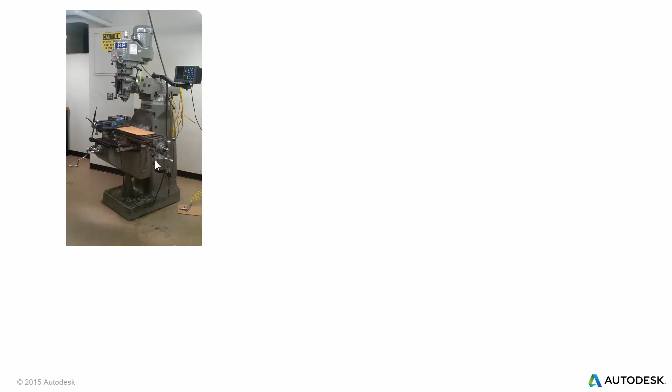This was one of the things that I ran into in the early 2000s. I was working at a manufacturing place in Rochester, New York, and it was a tool and die shop, and we were kind of converting from tool and die over to do more production runs. But what was happening was that the tool makers were really approaching their CNC machines the same way that you approach a Bridgeport.

What that means is if the tool maker needed a mill, he would go over to the CNC mill. If he needed a lathe, he would go over to the lathe—not really treating the machines much differently than we did in the old days.

So what we talked about in the Unattended webinar was how we could pile more stuff on the table and actually utilize the technology we have today. That's kind of what we're going to build on.

Before I get to that, in the last webinar I also shared my email address like I just did with you here. I got a few questions because I made a comment about this Matsuura H.Plus-300 that I use to program. This is an 11 pallet pool machine, and I think it fits pretty well with what we're going to talk about today. This was a great machine, and I loved running it.

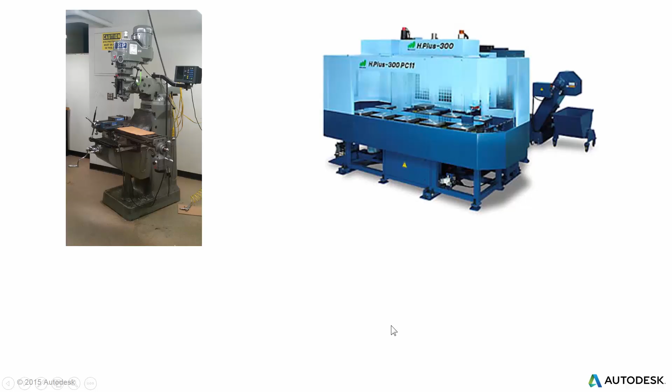Now, what I'm going to be using today is 3 software packages that we offer at Autodesk. I'll say, if I do a decent job—and you be the judge of that—I'd love your comments. Send me an email or put them in the comment area if you don't agree with me. But if I do a decent job today, it doesn't really matter what type of CAM software you're using. If you're using GibbsCAM, Mastercam, or some of the other ones, they have similar functions to what I'll be using today.

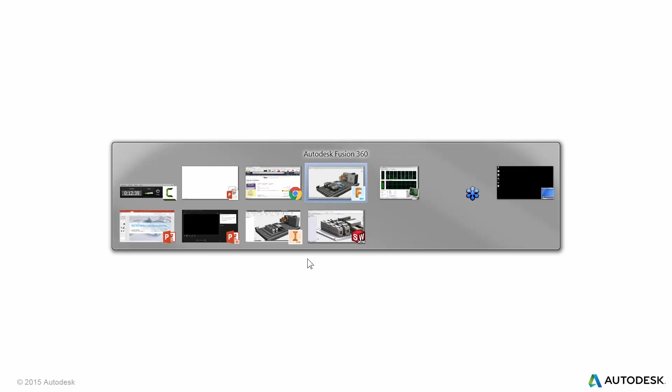Also, I normally get asked about pricing at the end. I have a slide for that, but I don't want to get into pricing right now. I really want to get into today's topic here. So let's jump into the software and get going.

What you see on the screen here is where I left off in last month's webinar, talking about running unattended. I'm really trying to fit a little bit more on your machining table than just one Kurt vise and be done with it. Because when you only have one vise, you can often only machine one part at a time, and that means setup becomes this huge overhead. Like I said when I started, when you're quoting machining, it's really hard to charge for setup time. Most people don't want to pay for you to set up the machine, but before you look around, you've easily spent 45 minutes setting up on the mill.

So some of the things you can do is try to add more things to the milling table, and maybe you're running all of them at the same time, or maybe you're just picking out what you have in there. What we had from the overnight run is these two types of vises—one is an orange vise with a dual station in it, and the other is a Kurt vise with a little fixture on this sub plate.

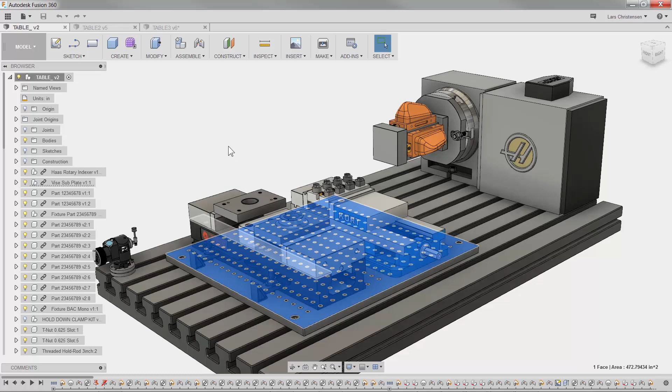I also talked a little about how, if you have the right type of job, something like a 4th axis gives you an option to machine multiple sides of parts. Of course, this all depends on what type of parts you can bring into your shop. I was a big fan of batching things together, and when we started running overnight, we actually did it only on Tuesdays and Thursdays.

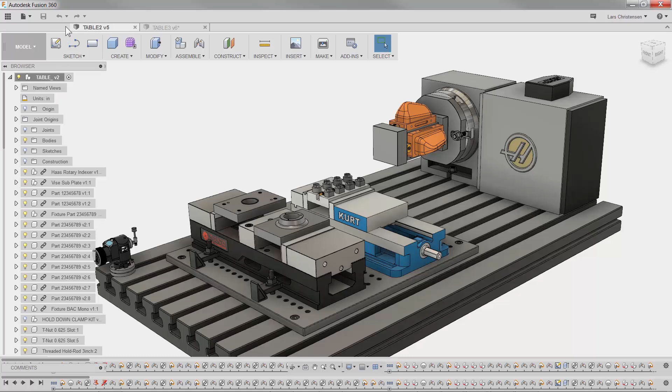So what I did for today's topic, where we talk about making your mill run longer between setups, was introduce another type of vise. I'm swapping out this orange vise, which is a dual setup, with another type of vise that's very handy.

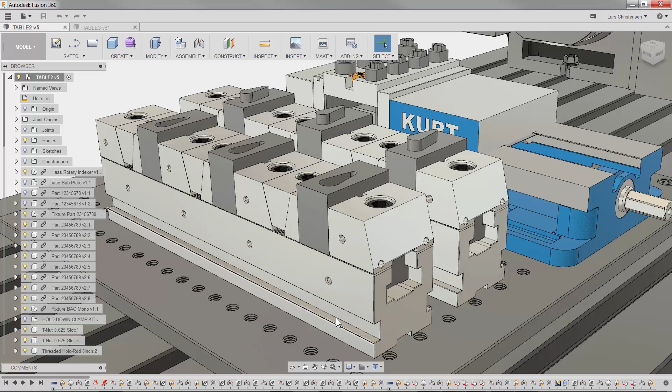These vices are specifically from a company called Tombstone City. I've used these and had great luck with them, but I know other manufacturers make similar ones - I know Kurt has something similar. What's special about this type of vise is that each jaw is actually sitting on teeth, which I hope shows up in the image here.

This means that with this type of vise, you can actually move things around. You can take these different solid jaws I'm highlighting here and shift them around for different types of parts, giving you the flexibility to run a bigger variety of different parts. I'll come back to this setup in a bit when I jump into Inventor - right now we're inside Fusion 360.

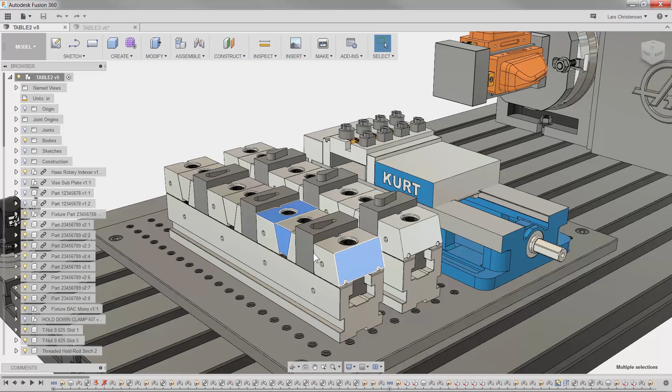One of the things I wanted to show about these vices is that I sometimes took this whole end section here and replaced it with something like this. This might show up better if I've already programmed something - turn my stock on here. Now I'm almost using the bottom half of these vices as a standard vise, while still having room for some other parts over here.

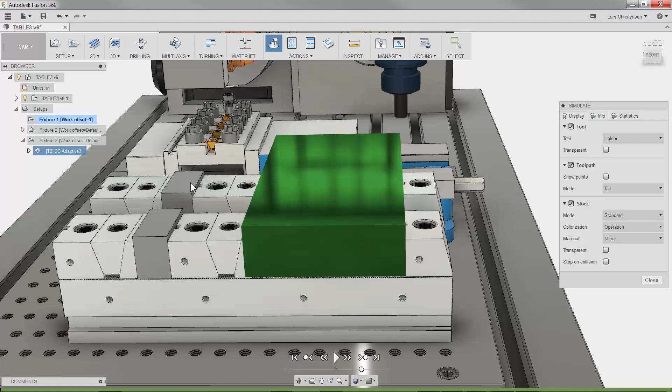So what I'm talking about here is, if you can set up your machine so it's a little more flexible for different types of parts, that gives you an option to run different styles without constantly having to fit things within one vise, take the vise out, clamp things to the table, and so on - so you're sitting idle all the time.

So definitely think about your work holding. I'm not affiliated with any of these - this is just what I've used in industry and found extremely helpful.

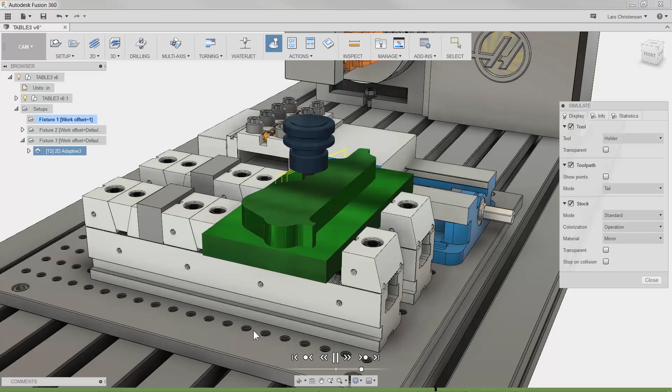In this case, I'm machining a part that I'd normally run in a standard Kurt vise style, but now it's actually running on the bottom end of this Tombstone vise, where you can adjust and program other parts.

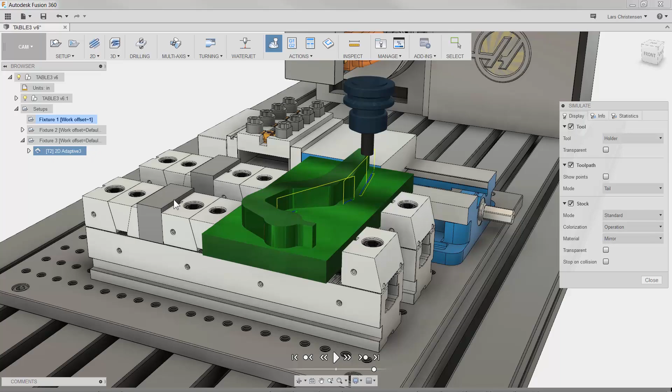If you didn't see the webinar from last month, let me move over to the Kurt vise here and just quickly talk about what we have over here. I used these parts, or a variation of them, in my last webinar. What we have here is actually a fixture within the Kurt vise.

I used to do this quite a bit - it makes it really handy. So not only holding your part in the Kurt vise, but actually building fixtures that you can hold within there. And then of course you can have a pickup hole or something on this fixture so you can take it in and out. Let me just quickly hide the parts here to take a look at this fixture.

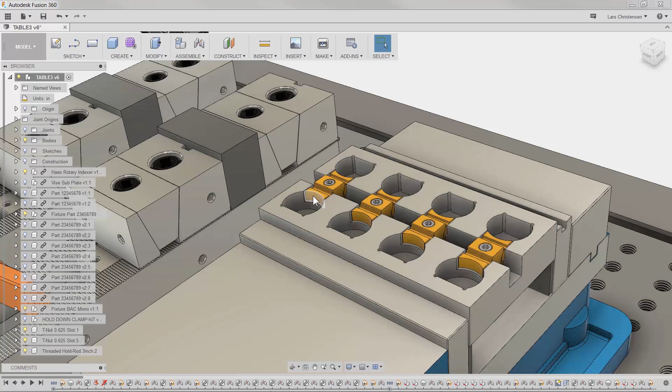This fixture could just be machined out of, for example, 6061 aluminum or something. And what I'm using here is something called Mitee-Bite clamps. Use those quite a bit. These are actually machinable, so you can machine that radius on whatever your part is.

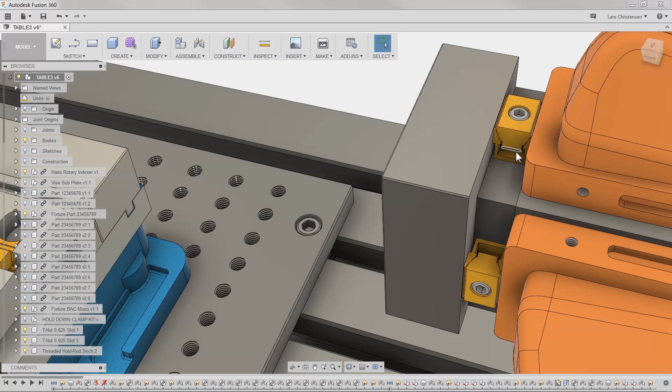But you will actually see I'm using them over on the A-axis also, another variation of these Mitee-Bite clamps. These are called Uniforce over here. So think about actually being able to create some of your fixturing inside of your machine and either make it so you can take it in and out by putting a pickup hole in or something like that, or literally machine a fixture as it's sitting in the vise.

So you know that the relationship between these holes and when you put the parts into them are going to be perfect. Because that's what would happen if I put this raw block of 6061 in here and I machined out the fixture and then I plugged the parts in. Well, then we can agree that I would have pretty accurate parts, right? It's only when you start taking things in and out of the vises that you run into issues. Now, of course, this all depends on what type of parts you are machining. But if you start setting parts up around on your table, playing around with that really gives you a big advantage.

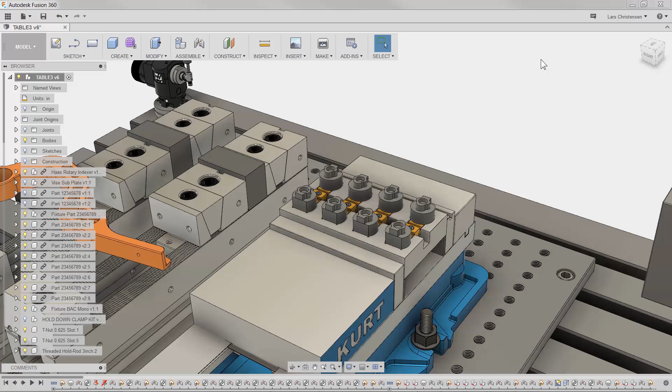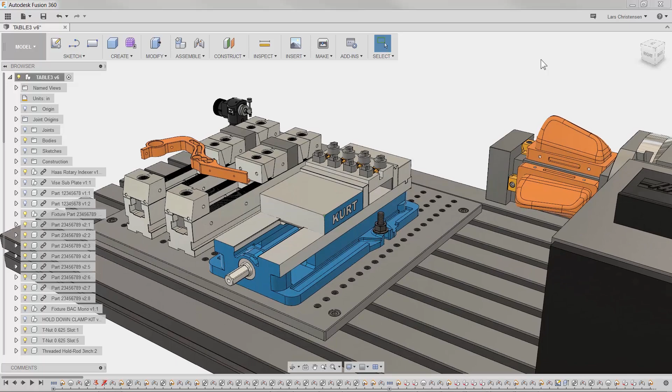And being inside of something like what I'm using today, Fusion 360, Inventor, or SolidWorks, really gives you an opportunity to design right inside of the environment in here where I'm also going to be programming. So this is where I'm going to put my CAM toolpath on. What I see here is an exact picture of what is out of the machine. That makes it a lot easier to program, means that I don't have to spend a lot of time out of the machine verifying things, because I know that what I have in my CAD system is what I have out of the machine. So that's just some of the things to consider when you're in this environment here too.

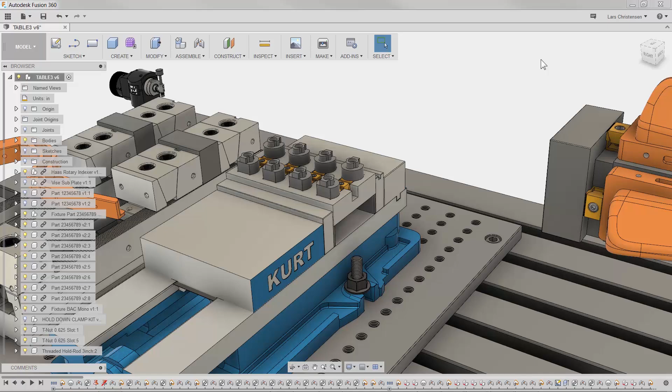Now, one of the things I showed in my last webinar was how quickly we can program parts by only programming one and then reusing that data on multiple parts. So here we have 8 parts that are kind of like the same size, the same batch. And one of the questions that came up from that was, how can you optimize your tool path so your cutter is more engaged with the material than it is making tool changes and so on.

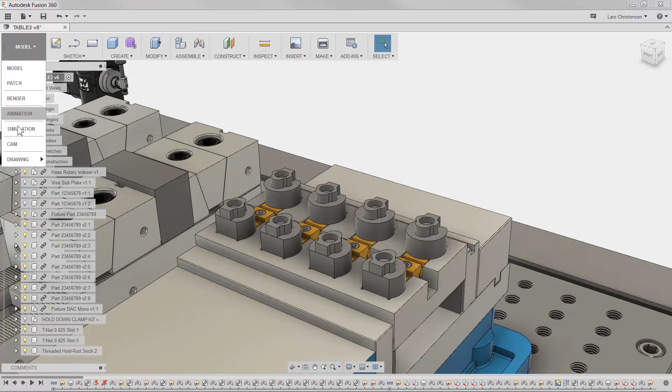So I just thought I would show that here, and we can kind of just dig into that and make sure that we get that straightened out here. So let me just jump into my CAM environment here, and I already have a setup for this part. So let's just go in and throw a couple of toolpaths on it.

So what I'm going to do is I am going to rough the part out. I'm going to use what is called a 2D adaptive clearing. I'm not going to get too much in depth with all the menus and stuff like that within this, because like I said, it doesn't really matter if you're using GibbsCAM, Mastercam, or something else. Most of these type of toolpaths is there.

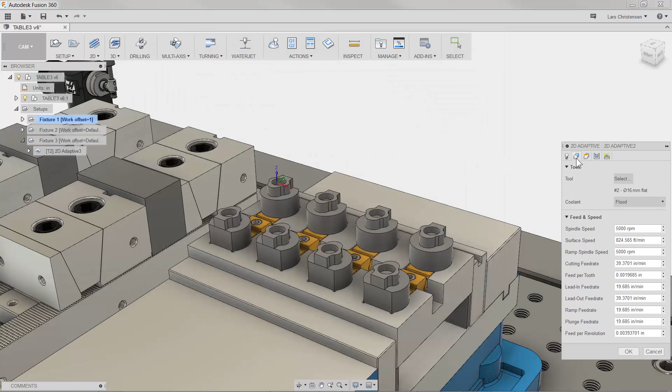Now I will note I'm going to rough it out with the same end mill that you saw. I just did that part over to the right over there. So I'm going to hit OK, and I'm just going to select right on that model here. So we have our rough toolpath. Well, let's just go ahead and simulate that. Hit play. And I'm not going to tweak things, but you can kind of see we quickly get that roughed out there.

I am also going to do a finishing operation. So I'm going to go ahead and select what is called a contour on that same thing. Now I'm going to select a 3/16 end mill for that, and I'm going to select the same edge just to finish around there. So we got that. And then you will see there's a little hole up on the top. I'm going to just go in and do what is called a circular toolpath on that with the same tool. It's not really too important.

So what I have now is three toolpaths, and that is going to finish off that part. So it's going to rough it, it's going to finish the outside, and then it's just going to do the center hole there.

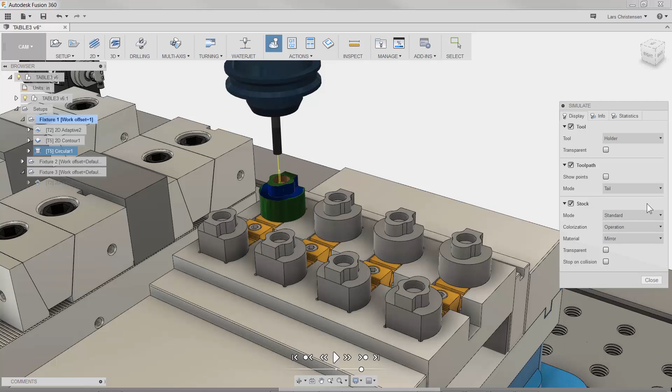What I showed in the last webinar was how easily I can apply these toolpaths to the rest of these parts. All I'm going to do is highlight them, right click, and create a pattern from these. You get different options here - you can do a linear pattern where you choose how far you want the jump to go, you can see a little jump pop-up shows it, or you can do circular patterns. But the one I picked was called a component pattern. What that means is when I select my part that I programmed, it will find all the same parts that are in here. So just like that, I have now programmed all of them.

Now, one of the questions that came out of the last webinar was about order of operations. I wanted to take a second to show that, because this is extremely important when you're trying to become better at programming. Like I used to tell machinists I trained, you want to become like the pit crew at Formula One or NASCAR, where you're top notch, the best out there. Knowing some of these functions is very important. If you're feeling completely comfortable with what I'm going to show you now, you should pat yourself on the back, because you are actually in the top 10% of people who understand utilizing technology.

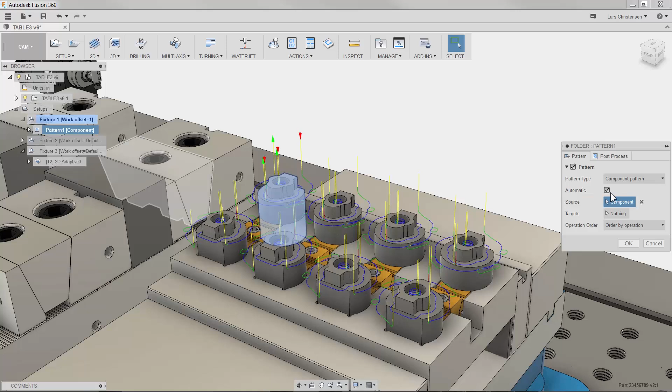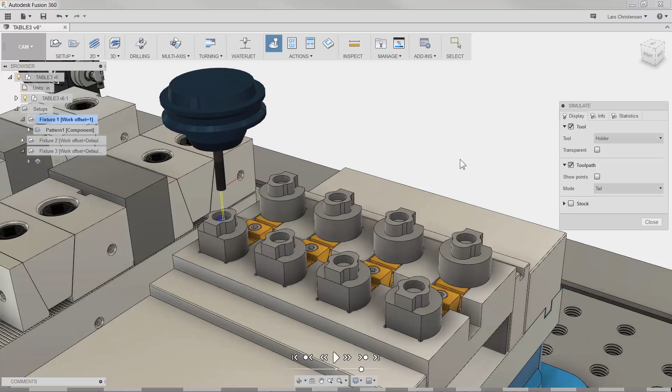So the last option is order by tool. Now we will see that it is going to do each part by the tool. So the first one's going to run through here just like it did before - I'm trying to speed it up, but I can't. There we go. And now you will see that it's finishing at the top. So this is the way that you can very quickly program in your CAM software like this, but also where these small settings within whatever CAM system you're using can mean that you can be more efficient in how you're programming. I think it's worth thinking about this and utilizing these tools here.

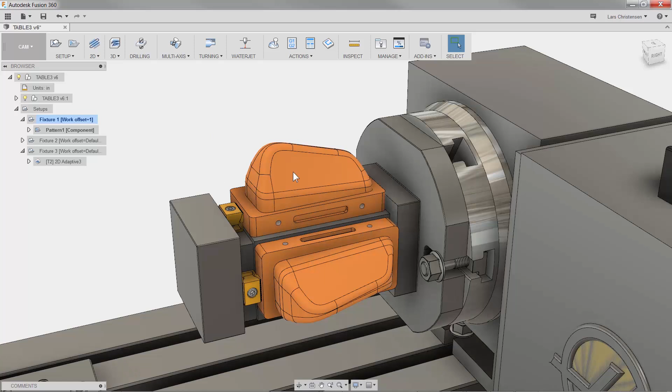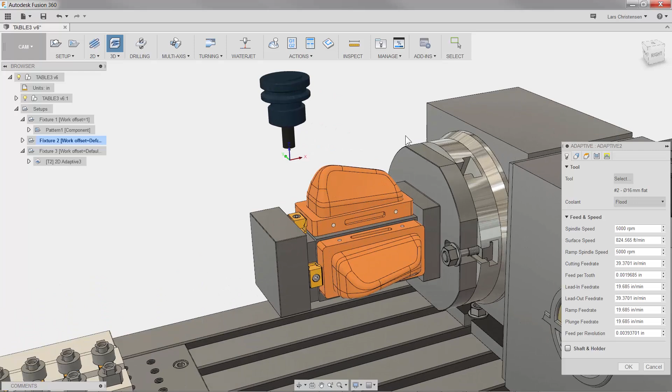Now, another thing I just quickly wanted to show that I think is important. When I programmed this, I actually did it in SolidWorks with HSMWorks in the last webinar. This one here, I'm going to do in Fusion. I programmed this part here, and I have a setup for it. So I'm just going to go in and make that active, and let me apply an adaptive clearing here. I'm going to use that same end mill that we used to machine this part down in the lower left, our little fixture here, and then I'm going to use the same one over here to rough this part in. All I want to make sure is I only machine to this depth here. All right, like that. Now I'm using adaptive clearing here for this - it's a really great toolpath.

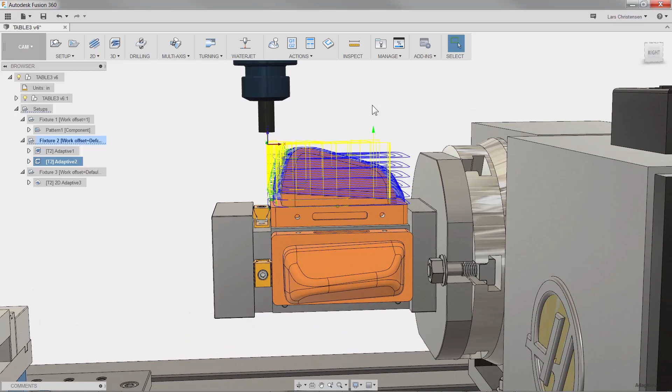What you will see, when I go in and simulate this, let me turn the stock on here and hit play. You will see down at the bottom some red lines because I'm going to have some collisions, as my tool is not sticking far enough out of the holder, and it will actually collide with the stock.

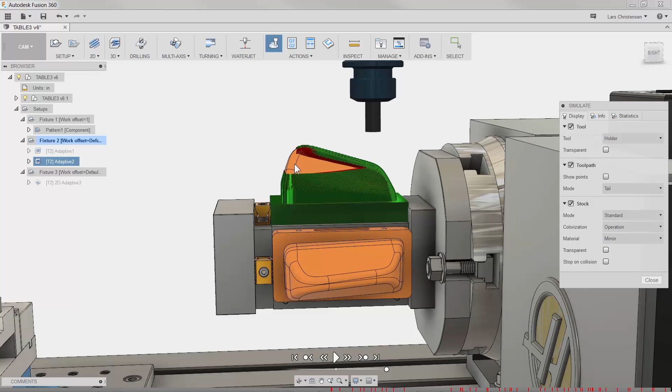First of all, you see the tool turns red, but you would also see it get a big gash right here. This is not pretty, and like I said in the last webinar, no sparks in the dark, and that is definitely still the case. Anybody who ever had a tool holder hit either a fixture or stock knows what I'm talking about.

But there were a couple of different options in here that can help us with this. If you go down to the bottom, there's something called shaft holder detection, and that exists both within Fusion 360, within Inventor HSM, and also within HSMWorks that runs inside SolidWorks.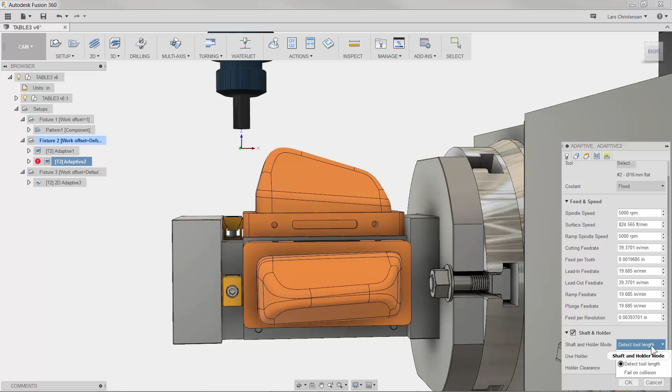I have some different options. One is called pull away, where the tool will stay away - it knows where the tool and holder is and will step away from the part. That means it's going to leave more material down here because that's where it would collide. So the tool backs away from the stock. It's helpful because we're not colliding with our part, but it will leave some more material for our finishing operations.

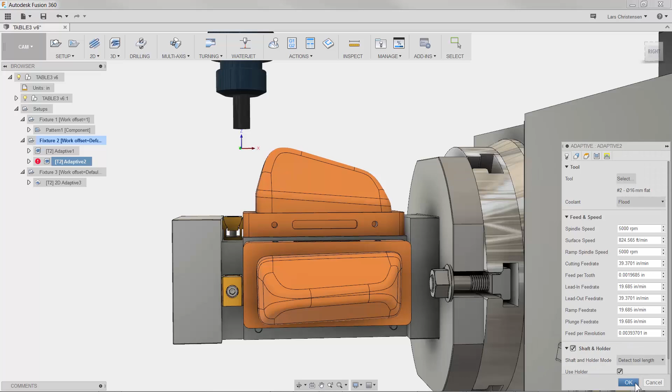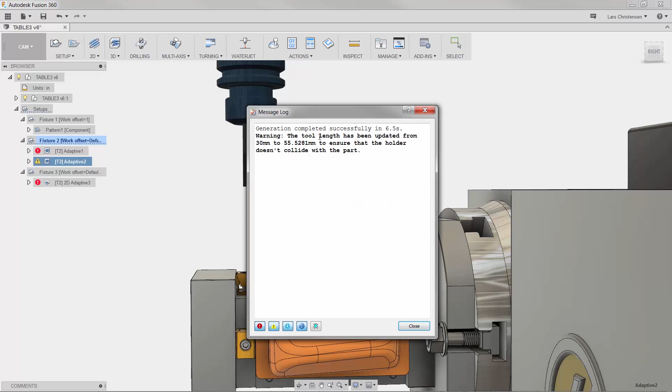But the other one I showed was called Detect Tool Length. When you select Detect Tool Length, the software will analyze, and you'll see the tool is going to be further out of the holder. Just like that, you see how it extended the tool out of the holder to be able to come down here without crashing. It gives us a little warning, and if I right click and hit show log, it will show us that the tool length has been extended from 30 to 55.5281 millimeters.

Now the reason I'm showing you this is because it's important to know this takes effect all across. That means the first part of the program, if we go into that one, that toolpath actually needs to be regenerated also because it has taken effect all the way through - the tool is now longer, not just on that part we just did it on, but the software is smart enough to know it needs to do that on all three places we are using this.

So what this means is by using these kinds of options inside your CAM software, it lets you do less testing out at your machine and therefore saves you time. So your machine can run, and run longer.

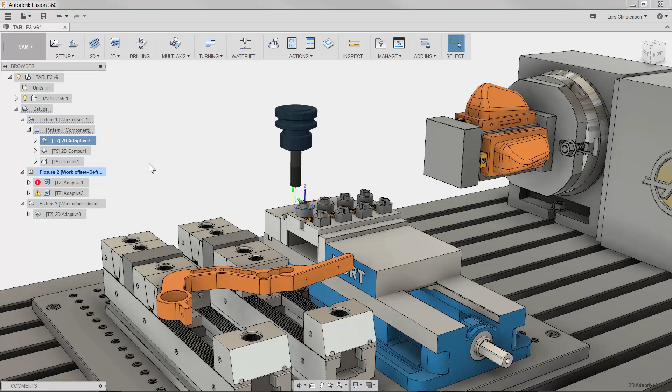I hope this is super helpful. So just to end out with Fusion here, think about how you can add more fixturing and parts on your machine, but also how you can utilize some of the things within your CAM system to help you program while the machine is running. So when you have that downtime where you got to load programs in and change parts and so forth, you can trust that what you're putting in there is good.

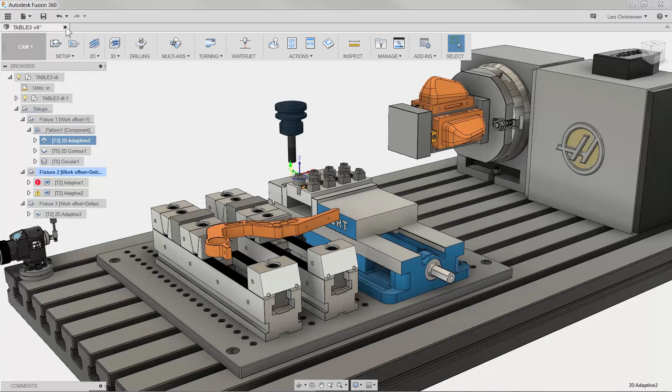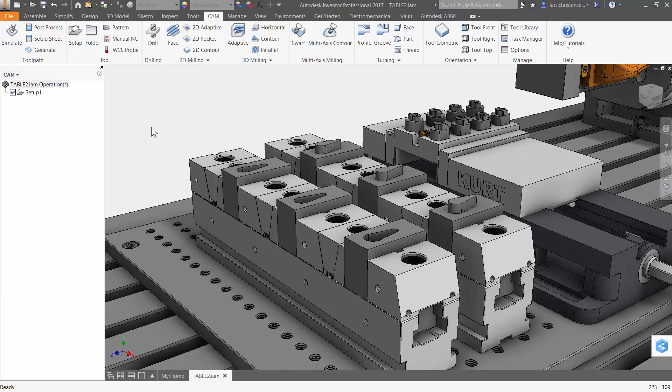But one of the things I showed in the last webinar was probing, and I'm going to show you my poor man's probe. If you don't have a Spindle probe, or if you have one, or if you don't have a Spindle probe, you might have a table probe here. You can utilize that with the poor man's probe, but you don't even have to. First, let me talk about the standard Spindle probe that maybe is in your machine and how you can utilize that. What I want to concentrate on here is we've got these 3 parts sitting here, and I already got one set up for one part, so you can kind of see how that highlights right here.

One of the things I used to run into was even running small batches of production, let's say 8 parts loaded into your vices, you'll always have some kind of stop in there, but misloads can still happen. One of the biggest advancements in milling recently is spindle probes and how you can use them to set your work offset, not just when setting up your vises or picking up your part in the beginning, but throughout your program. Let me show you what I'm talking about.

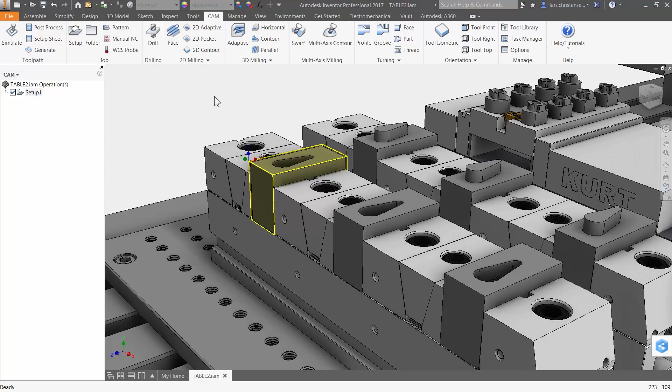Right now I'm inside of Inventor. If I go in here and select a probing cycle, I'll select my probe, and select what I want to probe, the top face here. So what I'm getting is a probing cycle that's going to go in and find the center of this part. Let me quickly simulate it so you can see. I'll hit play here, and you see the probe is going to go in and pick up the center of this part.

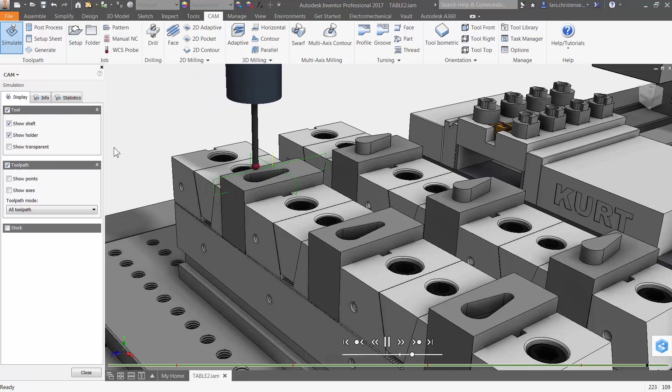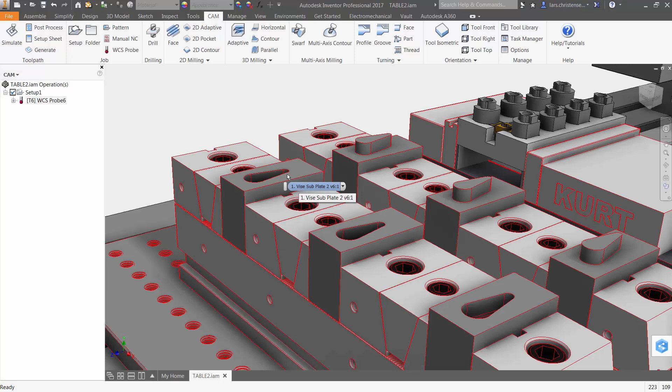What's really neat about this is I can use the probe to reset my work offset. If I set my work offsets up, one being G54, G55, G56, I can have it so you put these parts in here, and even if you don't get them right up to the stop, if you just get them close, my program can re-pick up the part and reset that G54. Let me show you what I mean.

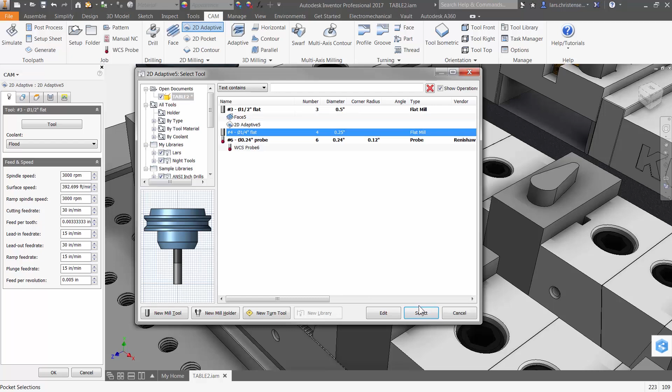For this operation I'm going to set a facing operation, I'll do this quick, using our 1/2 inch end mill. I have a facing operation, and I'll also quickly do a 2.5 axis. Now I'm going to change my tool to something smaller, a 1/4 inch end mill, and just pick the bottom here. Again my point isn't so much about programming a part, I'm just making a couple of operations.

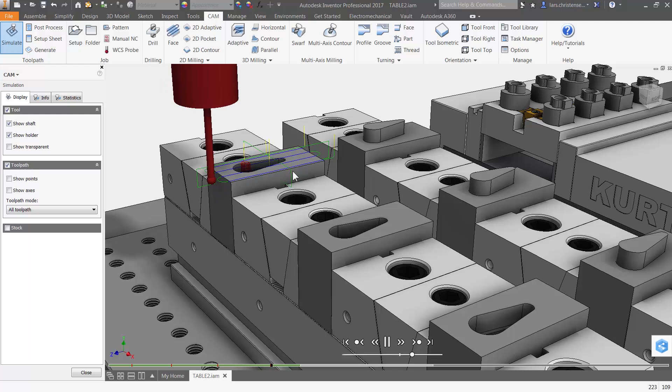So what I have here is a cycle for machining where my machine is going to go in and begin by picking up the part, resetting the G54, then it's going to face off the part, and then it's going to rough out that center pocket.

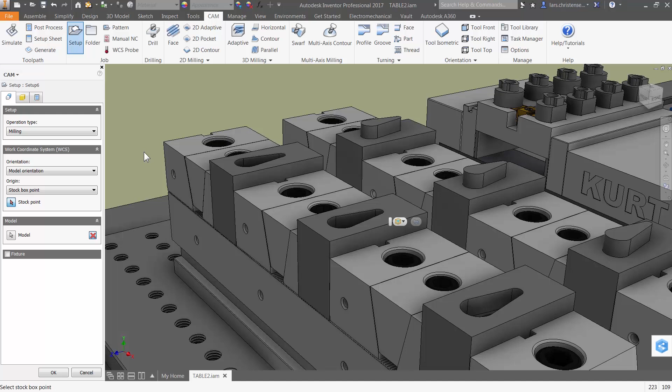Now what I can do is create a setup for the next part down here. So really what I'm doing is not relying 100% on people putting the part 100% correctly in the machine. I can have an operator load the parts in and assure that if there's an issue, if one part is, let's say, 20 thousandths off the mark, that my software will actually correct for it. And I'll do that right in here.

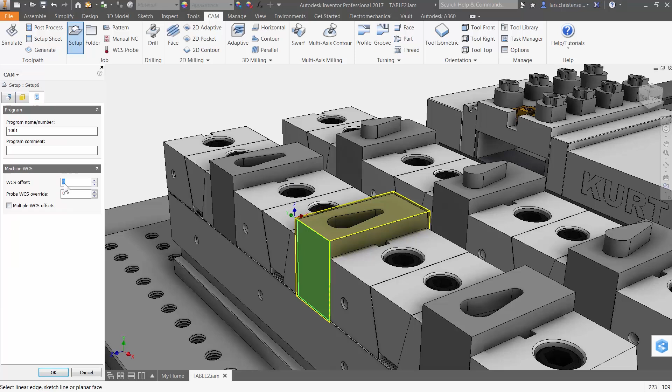So G55 is actually number 2 right here, so I'm setting that here. This is G54, number 2 is G55, so this will be G55. All I'm going to do is go up and copy these 3 operations, right click, hit copy, and paste those to my next operation right here.

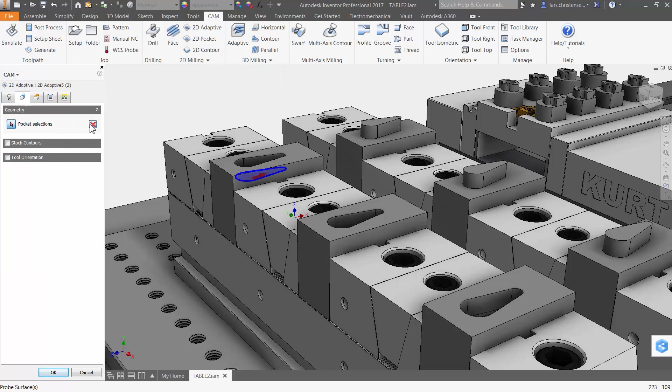Then all I have to do is go in and tell it that it's actually this face that I want to probe now. The facing operation I don't have to do anything with. The roughing for the pocket, I have to do the same thing, just go in and tell it that it's the bottom in here, just like that. And now I've made this one here.

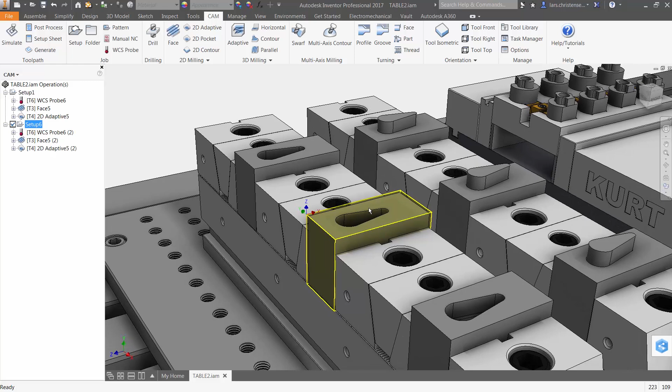It's going to pick up the part, reset G54, machine this part, then go down to this part, re-pick this one up so that it's G55, and machine that part. Then we can just go down and do one more for the last one.

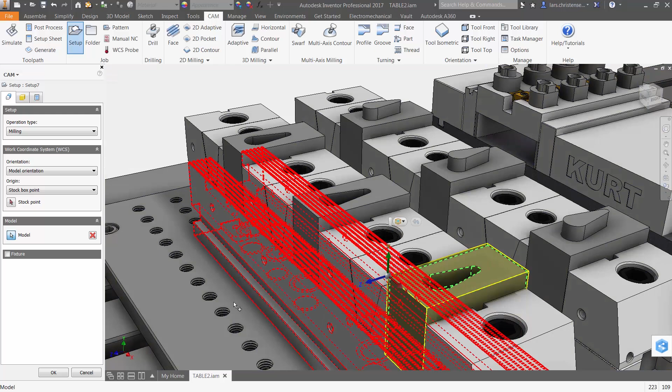So now you're making sure you're not relying on human error when loading these parts in, because if they load it completely off, the probe will throw an alarm because it would either hit a surface it shouldn't hit, or anyways, this is a way you can utilize this technology if you have a tool probe. I'll show you in a second if you don't.

So this one here is going to be number 3. What is it, 56? Yes, so 54, 55, 56, there we go. Again I'm just going to paste this in here, and let me just reset. My probing surface is now here.

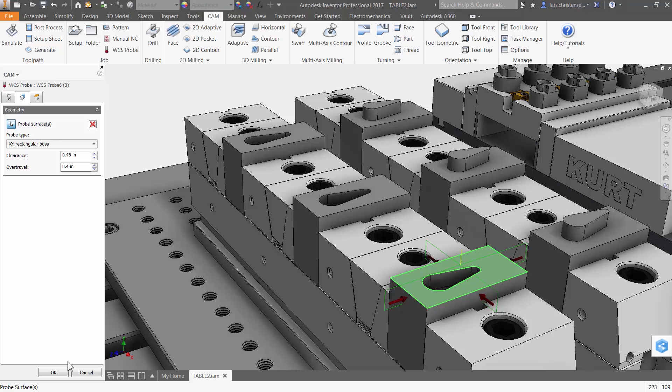The facing operation we don't have to do anything with, because it's smart enough to know. And then for the roughing operation, I'm just going to re-pick up this surface right here.

So we now have set up a way where we can have the machine helping us with less downtime, because we can load the parts in quicker.

And if I actually go and post this out, because let's just face it, all this is just tools. The code is what matters. So let me go out here and just post this out.

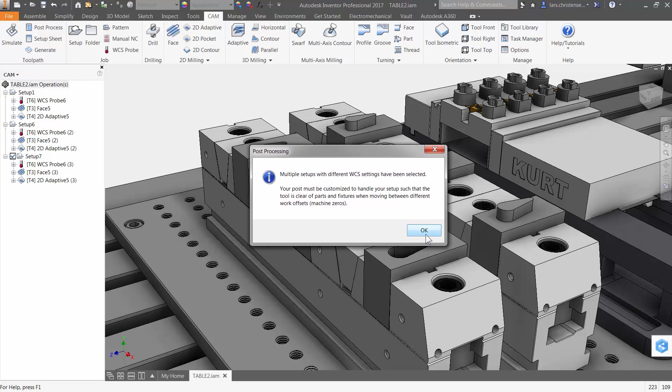It's giving me a warning that I'm using multiple work setups, so my posts have to be set up for that. But of course, with our software, all these posts ship with it, and we also have another post dedicated page. I'm not worried about that. Let me just post this out as a Haas post.

And you will see here we got our code. So what we get is the probe cycle. This is a Renishaw type probe, just using macros. It will go in and pick up the G54 again and reset that. So our first facing operation is now the G54. And after that, it's going to do the roughing operation.

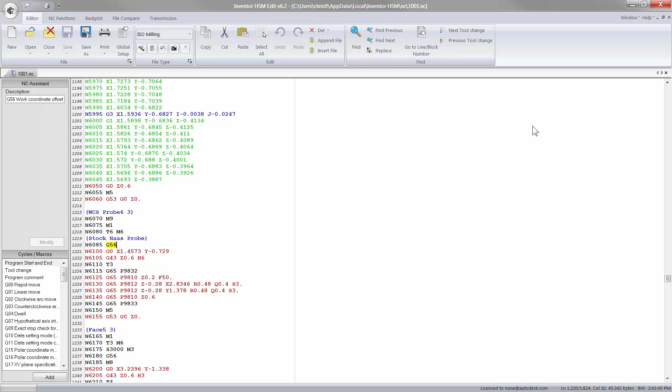If I just go down to my next tool change, you'll see the next one does the G55 on the second part, resetting that, and then using G55 for that facing operation. And of course the last one does the G56. So be aware of these kinds of functions that make you be out of the machine quicker to get things going.

I think that this was pretty quickly programmed, with multiple stage setups. You could, of course, also do that with some kind of subroutine. All right, I'm going to wrap this up here.

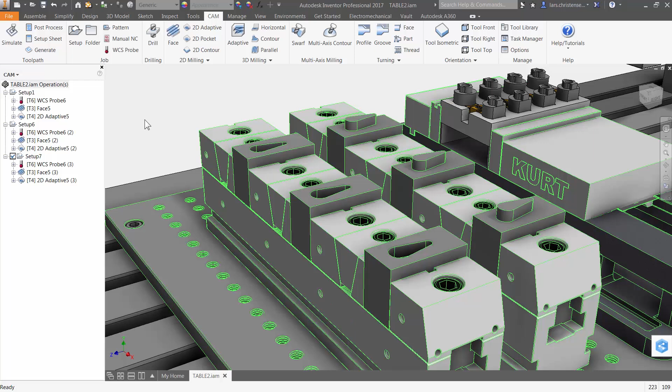The last thing I wanted to show was what I call the poor man's probe. So let me just jump over to SolidWorks here. I could have done that inside of Inventor too, but I just thought, why not show you that in here.

So I have kind of the same setup as you just saw. The biggest difference here, though, is that I have the blank stock in here, before it has been machined. What I did that was extremely helpful was I had, well, this actually started on a robo drill with a pallet changer where I had no tool, table preset, or spindle probe.

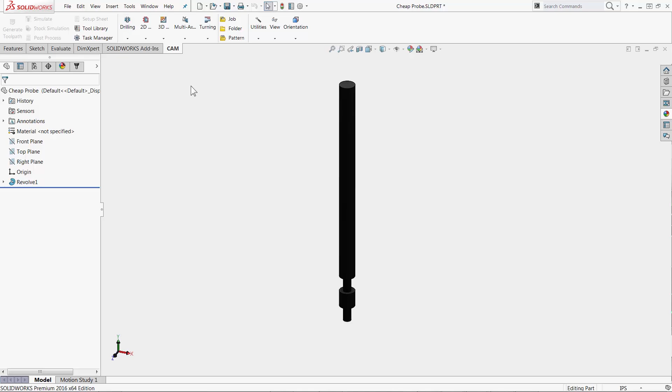But what I did was I created this little graphite probe. And if I go in and edit the sketch, it might be a little bit easier to see here. So all this is a graphite rod that is about a quarter inch in diameter and 4 inches long, and you can buy those for like a couple of cents.

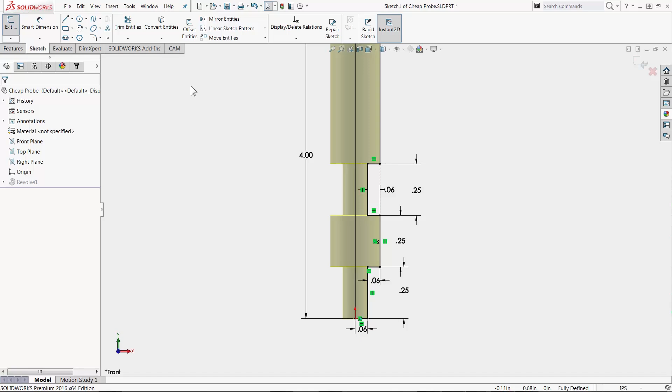And what I did was I got them ground by one of the guys in our tool room, and this is extremely easy - graphite is like a pencil, so it's extremely easy to grind. I made sure it was a pretty precise diameter of 1/8 of an inch, and then I made it a quarter inch long. This area up here was kind of like the breaking point for this.

So what I did with this little graphite probe was I actually brought it into my CAM software as a customized tool. Let me show you how you can do that. I created a couple of sketch lines, just standard sketching that you can do in whatever CAD and CAM system you have, and you can drive those sketch lines.

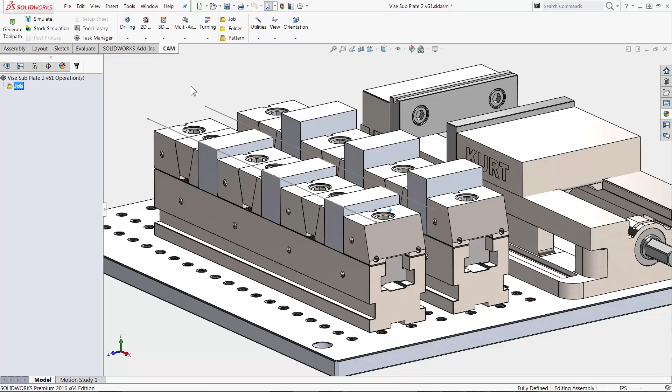So I just made a sketch line that was like 25 thousandths past, or outside, my stock part. So when I go in here and create a tool path, I go into my tool library - you can actually create custom tools. So I'm going to create a new mill, I can create that form mill, and now I can actually pull in that SolidWorks part file you just saw.

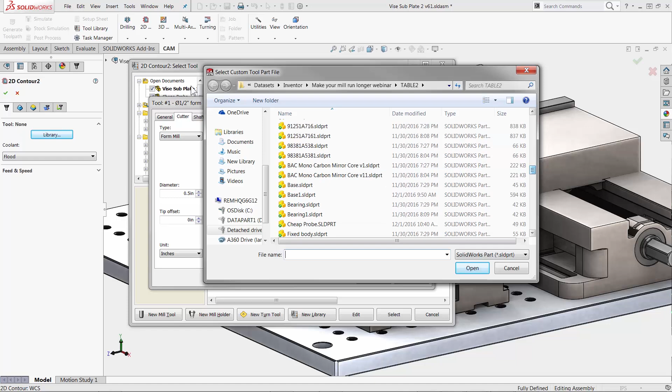So I call that a cheap man's probe. Oops, I must have passed it. I can do the alphabet right there. Cheap probe - so there you will see the probe. Now I can adjust how long I want it out of my tool holder.

You know, you can adjust all this, and I actually am going to do it to the minor diameter right there.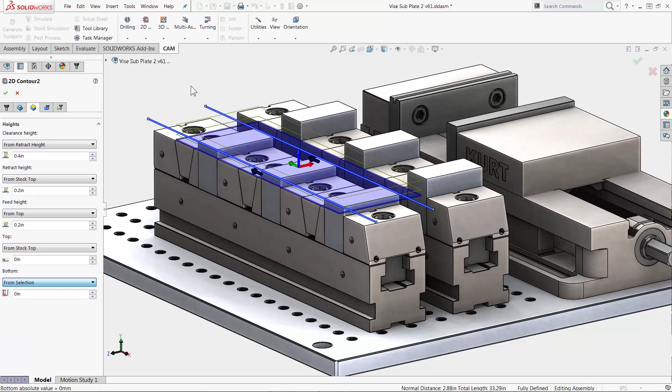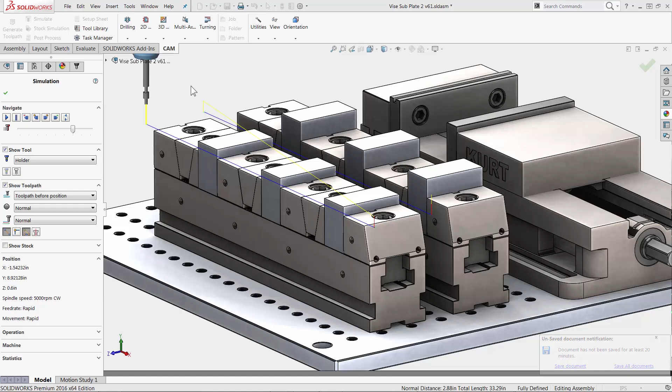So here I have this graphite holder sitting in a standard tool holder. And what I would do with that was, before I started machining anything, I would literally drive down these two sketch lines like this, and I just need to give it a depth. So what I want is a 25 thousandths or so clearance. So if the operator misplaced a part, this little 20-cent graphite probe would break, and then you could just regrind on it, of course.

So let me just hit play here. You can see it run. So here you can see the holder comes down. Whoops, see, that one would actually hit. Let's just go in and reverse the direction on that. So that second one's going to go that way.

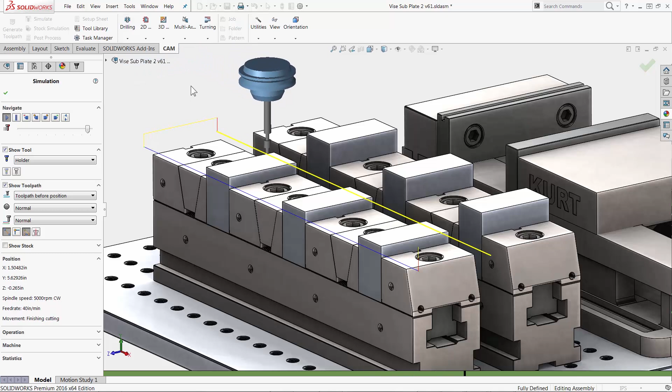There we go. So what you will see here is that the probe will come spinning down along the side, and this could be a high feed rate, almost a rapid move. And if that little end is still intact afterwards, well, then you know that you're good. But if it is not, then you know that there's a misloaded part, which is definitely a lot better than breaking tools. Let's go in here on the end and take a little bit closer look at it.

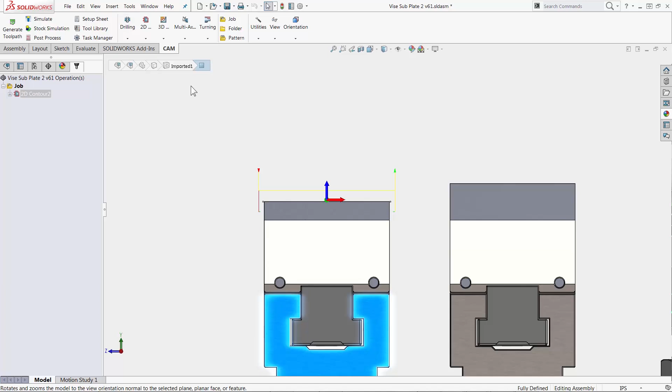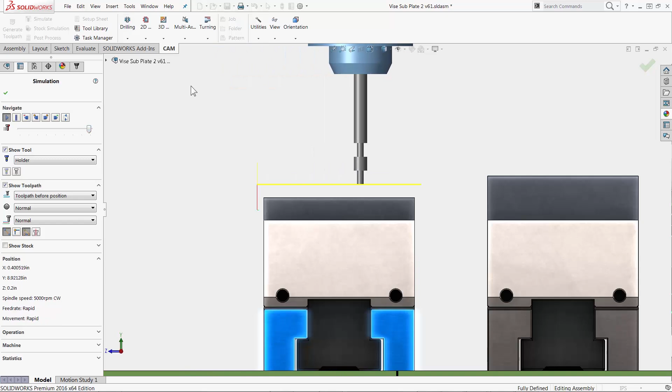And if you have a table probe, you could go ahead and check that at the end. Let me just hit play so you can see it here. So it's going to come down, and then you can see how it's just very close to the edge. The top here, the gray area, is your stock, and that will make sure that if there is any part that is not loaded correctly, that little tip there would break off.

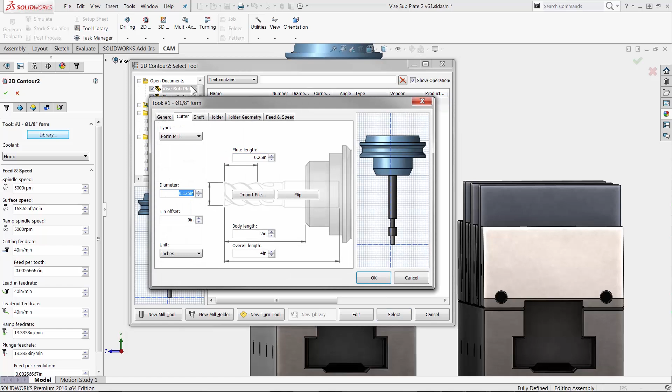If you do have a table probe, then you can actually go in. I go back into the tool library where we were before. Right in here, let's go ahead and edit the tool. I could actually turn on break control right here. So now if I had a table probe, every time this tool ran, it would go down and make sure that that little tip is there or broken out.

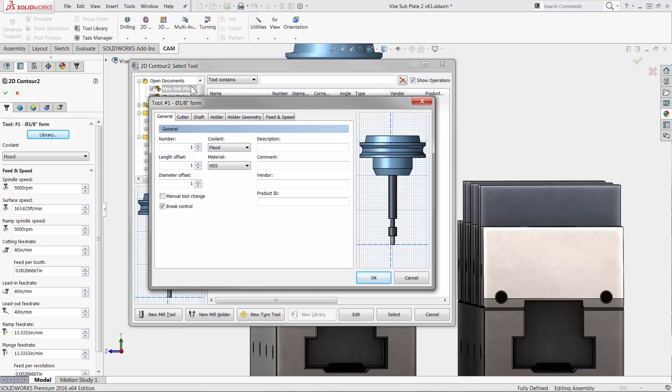Now on this Robodrill that I did it on, it didn't have anything on that, so it just required that it would run before any tools ran, and then it would have an M00 stop, and the operator would have to stick his head inside the machine and just confirm that that little tip was there. And if the little tip was there, well, then you were good to go. Again, this avoids you spending a lot of time troubleshooting.

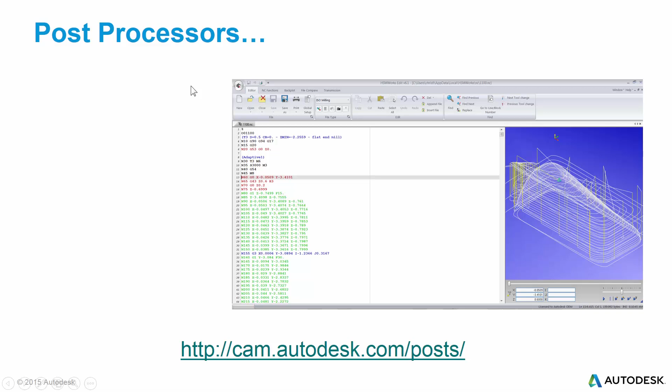So let me just get back into the PowerPoint here and do the recap before we go to the questions. So first of all, post-processors—definitely make sure your post-processors are tweaked. I showed you what we have inside of our software. We also have another library. I can show you that if anybody puts that in the comment area.

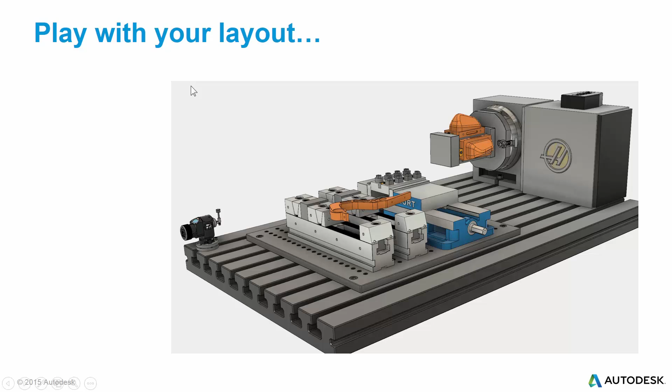Play around with the layout on your machine to make sure not only you can put more parts on the table, but also think of ways you can be more flexible. So like in this case here where you have a sub plate you can take in and out, now all devices are indicated in. So if you're just throwing everything on this plate, all you have to do is maybe indicate that straight and pick one hole up, and everything is where you want it. Makes it helpful if you have it drawn up in your CAD system.

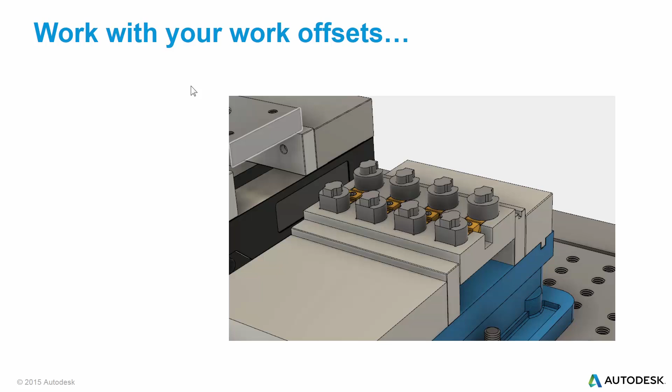Work with your work offsets too. Make sure you're comfortable with how you can use your work offsets. Most machines actually have past G59. Most people are familiar with G54—you got 55, 56, 59, 57, 8, 9, but then you actually also have more, so make sure you know those so you can utilize them. There's a G54.1, 0.2, and so forth.